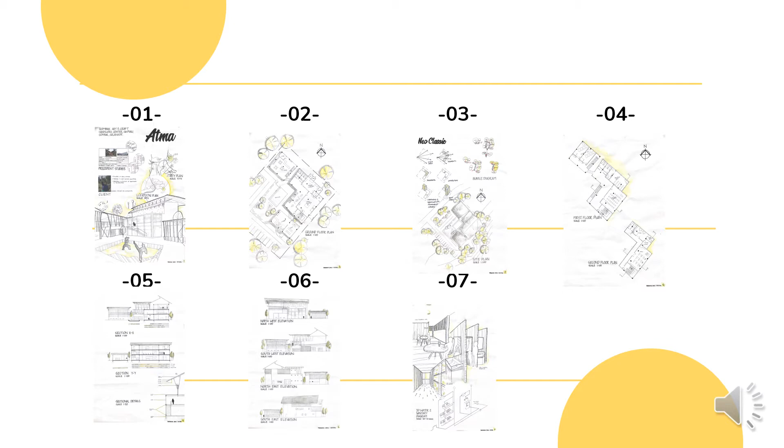Keris is a unique martial weapon used for thrusting, and it is also popular in Indonesia and Malaysia. The title of this project, Atma, means soul or life in Malay, linking to how we should take account of our own local heritage by cultivating the arts and restoring it within our community, as if it is the soul of our culture, in hopes to not only restore but also relive the heritage of Keris that is incomparable.

Moving on to the site, my site is at Site A, located near Kampung Sungai Pusu and just opposite Mahalah Bilal Cafe, with the dimension of the proposed site 40,000 by 50,000.

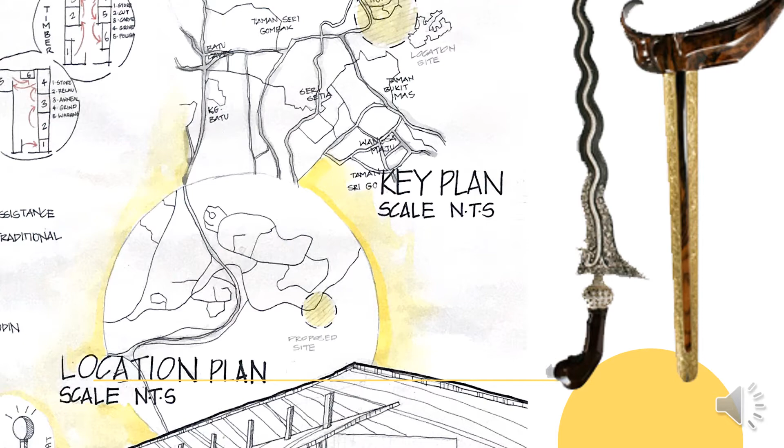A little bit about the client: Mr. Azrin Azwan is the founder of Keris Empire. Based on an interview with him, he preferred to have merchant assistance for the workshop and also requested a little bit of traditional elements in the building.

For the precedent synthesis taken from the studies, two buildings had been chosen. The first, Jetavan, located in India, with synthesis taken from the open roof structure and the use of timber and brick. The second, Arts and Crafts Studios in South Korea, with synthesis taken from the linear spatial organization and the use of metal cladding.

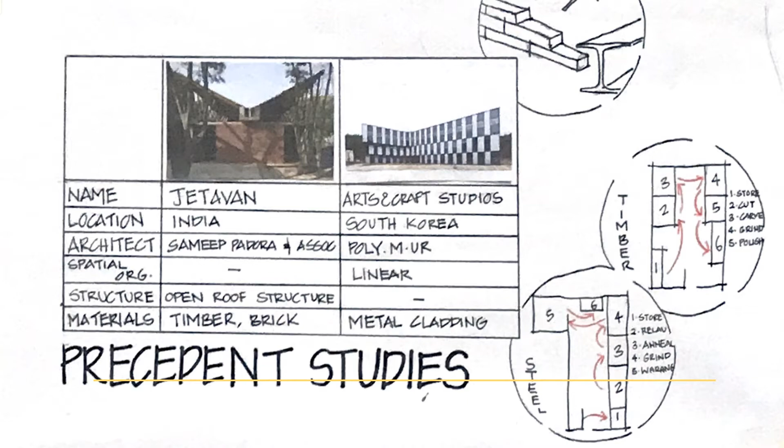As for the case studies, divided into two, the first being materials. The chosen ones are concrete, metal, brick, and timber. Brick and concrete have good resistance against heat, and brick also gives aesthetic value to the building.

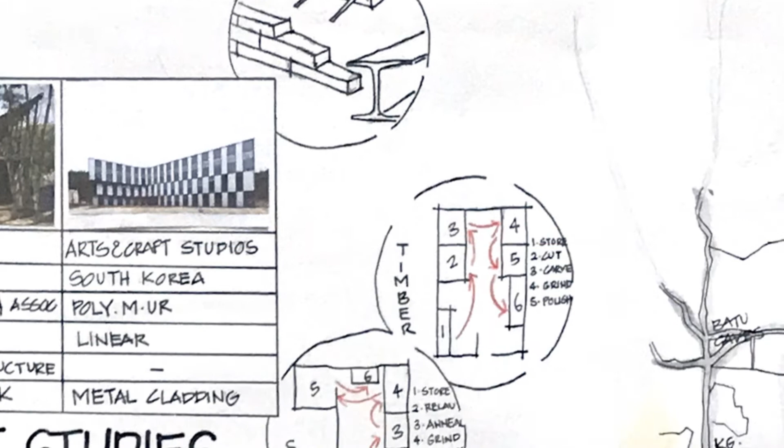The other is the study layout of the workshop, divided by two for steel and timber. Firstly, steel starts from storage material to relau, involving heating and hammering, then annealing, grinding, and lastly warang, the arsenic poison room. For the wood carving workshop, it starts from material storage to cutting, then carving, grinding, and polishing.

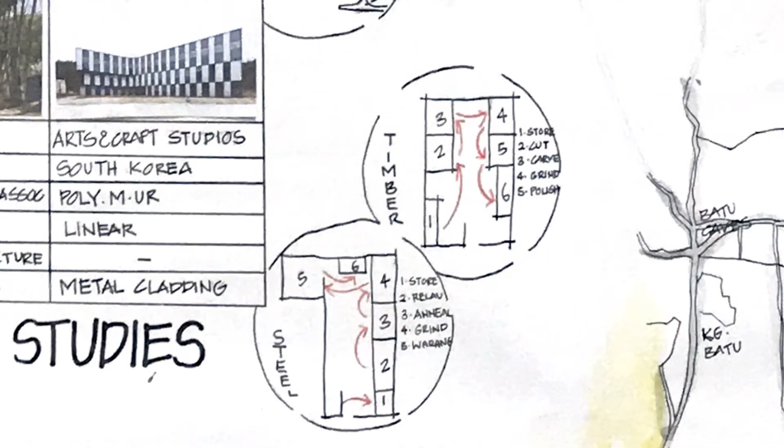With the studies and synthesis applied, for the site synthesis, firstly by making sure to utilize some spaces facing northerly to get maximum lighting and ventilation. Next, to add and retain the same species of trees within the boundaries, as the proposed boundaries lack existing natural features. Lastly, to have bollard lights and pathways, as the site lacks lighting for the night.

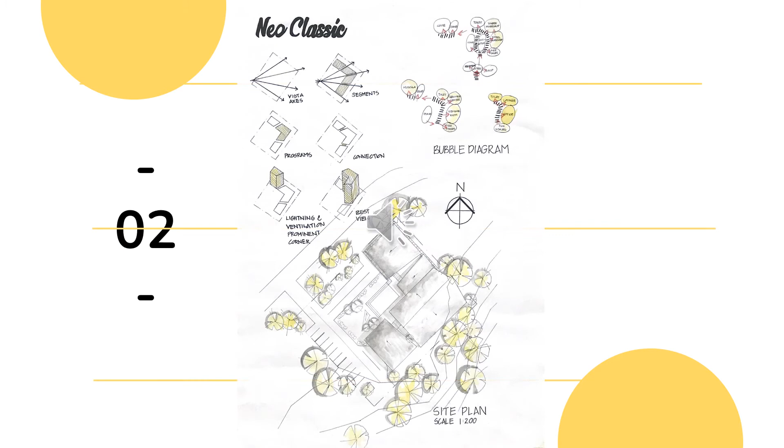Moving on to the second board.

About my concept, it is neoclassic. The ideas came from the client, who wanted to have the essence of local vernacular. To develop the concept, it responds to the site location, starting from the vista to the site from the entrance, where there are 4 vista axes.

Secondly, the forms are put in segments based on the axes. By deciding the programs under public, semi-public, and private, 2 segments are merged, and from the programs there should be a connection. Since the prominent corner is crucial for ventilation and lighting, it should be for spaces that require openness. Lastly, the best view area faces the forest.

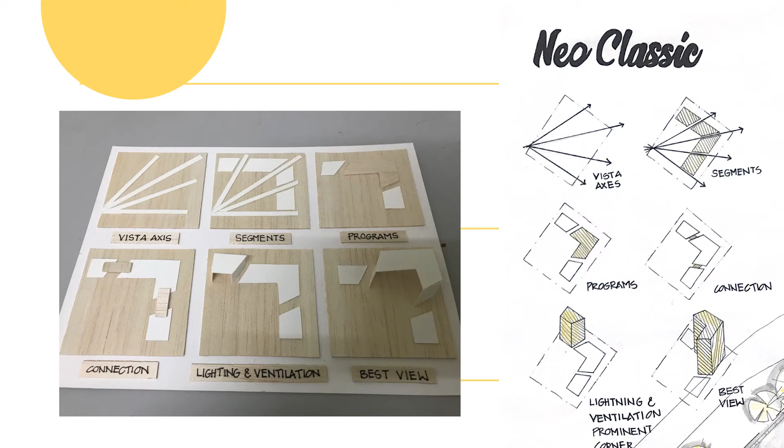The bubble diagram shows the circulation flow of the users. The fully shaded bubble highlights private space, half shaded is semi-public space, and zero shaded is public space.

Moving on to the site plan, there are 3 possible circulations. The first is drop-off only for guests, who will enter from the main road, then go straight to the drop-off bay. The second situation is for staff and visitors, who can enter from the main road and go straight and U-turn to find the parking spaces.

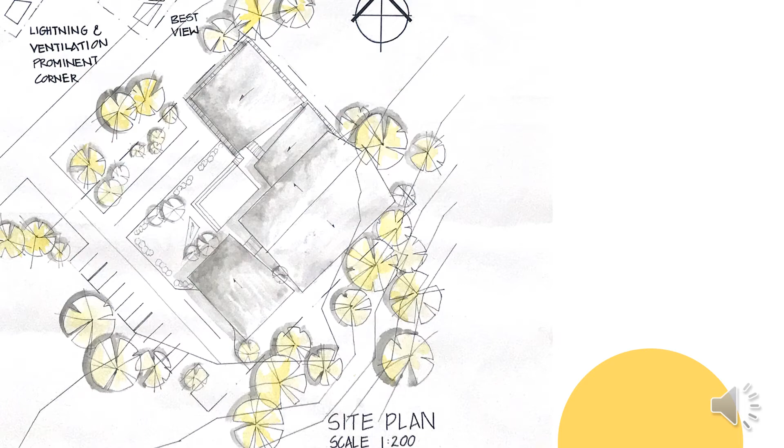Lastly, the services circulation. Without having to pass by the main entrance of the building, the service transportation will enter from the main road and turn left to the loading bay near the cafe.

One of the main attractions is also the pavilion space, purposed for commercializing our local culture, for example, silat performance.

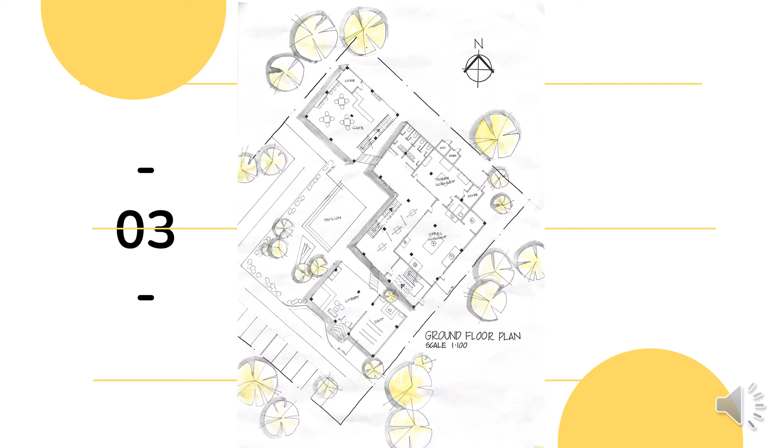Now is board 3. For the ground floor plan, the tailored version of the bubble diagram can be seen. As the ground floor will be accessed by everyone, most of the public use spaces are located at ground floor in the same program, such as lobby, shop and reception area.

Walk to the next programs, which include both internal and external use programs. It enters the open exhibition area at the wide hallway. From there, visitors can also see the Keris making process from the glass view of the workshops.

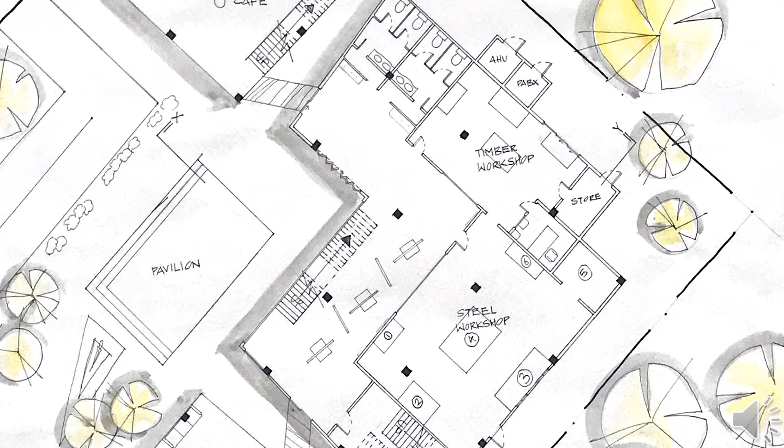For the blacksmith, they can enter the workshop from the building's back. Move on to the last program, which is the cafe and musola, where it is separated from the building because it can work on its own. For example, if there is a passerby that requires that kind of service. From the floor plan itself, it can be seen that post and beam construction is used.

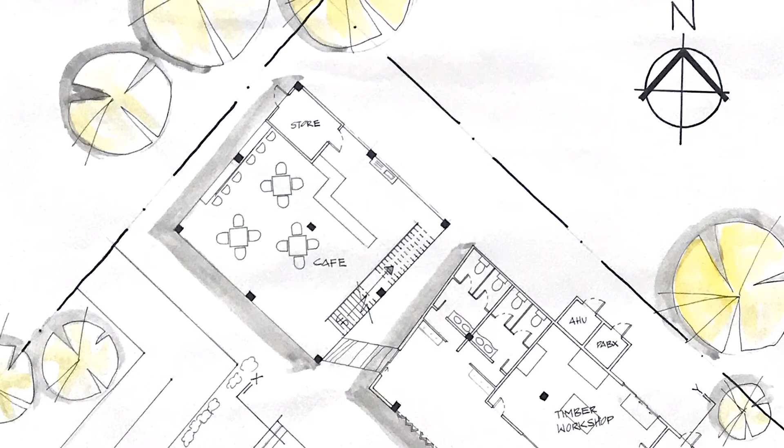Now to board 4. Going upstairs is the musola, which is connected to the other building. The first floor mainly focuses on the Edu Center, which consists of a resource center and seminar room.

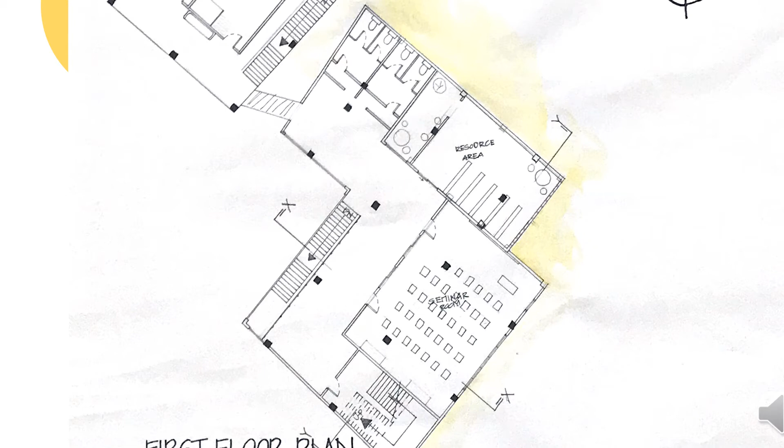The floor can also be accessed by the main open stairs, which is one of the attractions of the building too, as the stairs are not private. However, for private purposes, stairs for the office workers will use the fire staircase to the highest floor, which is on the second floor plan.

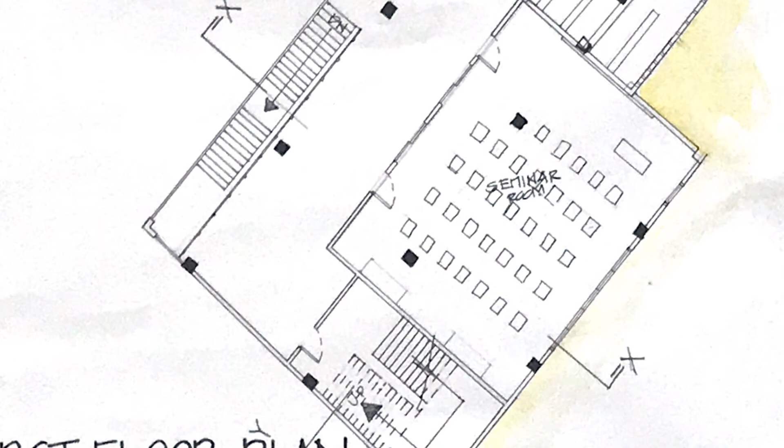For the second floor plan, it consists of office, lounge spaces, for example like pantry, and also a leisure room for the boss. The second floor plan corridor also applies a unique bamboo block to represent the vernacular architecture too.

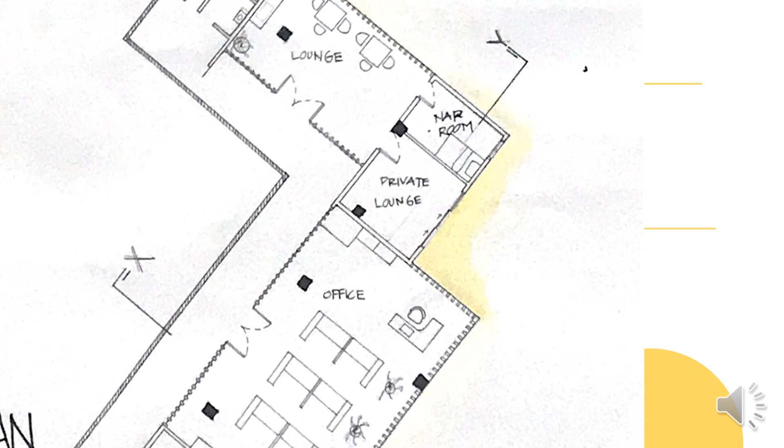Move on to the fifth board. From the floor plans, the first cut section is XX, which can be seen where the ground floor cuts through the pavilion, stairs, exhibition, and steel workshop.

For the first floor, it cuts through the stairs, hallway, and seminar room. And for the second floor, it cuts through hallway and office.

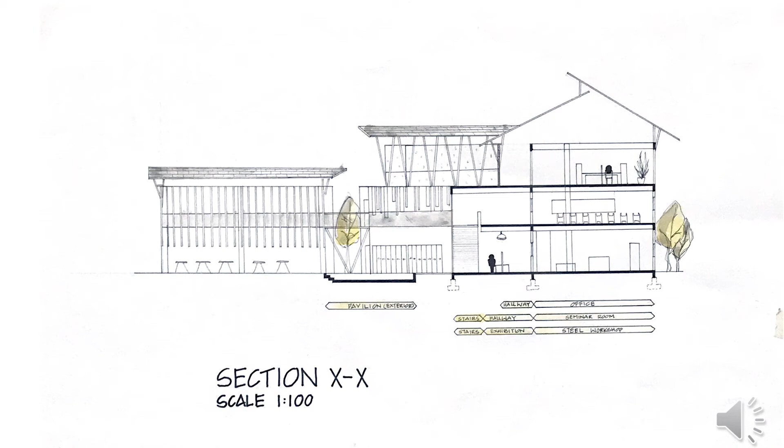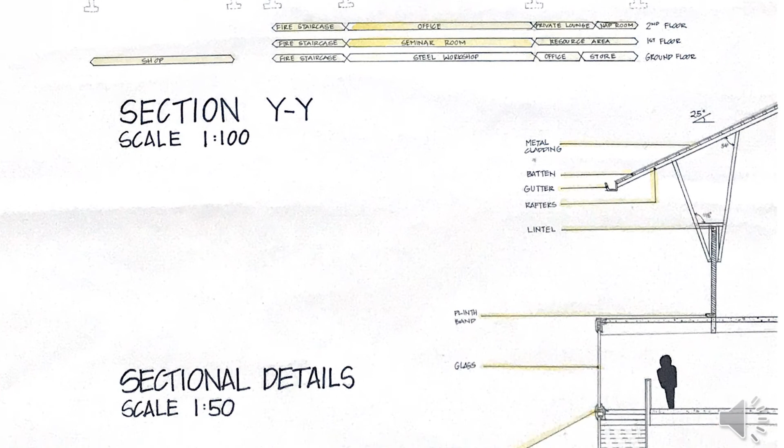From the sectional details, it cuts through the main stairs glass and through the corridor, which shows the timber bracing structure between the bricks and bamboo block.

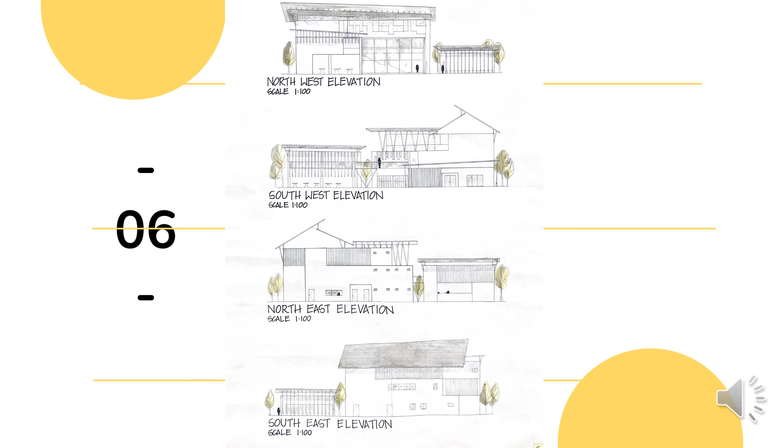Now we move on to the elevations. For the elevation, the northwest elevation shows the open glass main stairs facade, the pitch roof, and also the open roof structure.

As for the southwest, the facade applied at the cafe area, as it is facing the public parking spaces, involves the use of louvers. Same with the lobby space. By having louvers, it embeds a sense of privacy for the space too. Hence, it would be good for musola spaces.

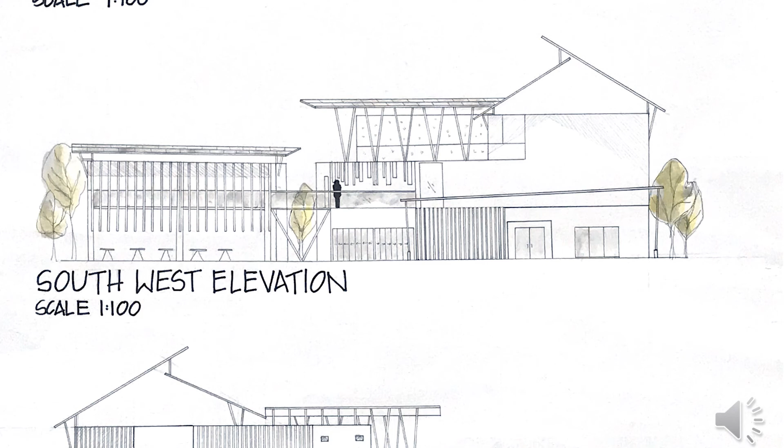As louvered facade works best for air renewal and shading, the northeast elevation applies it to the lounge area of the internal workers. Lastly, the southeast is the back of the building, where you can see the material used is metal cladding, which is used at the roof.